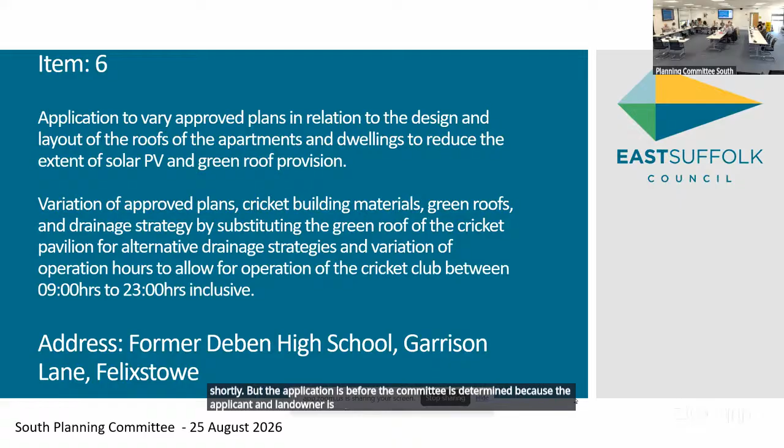So this is the application site. It includes the land that is hatched and then the land outlined as red. The access is off Garrison Lane. The road on the eastern boundary is Garrison Lane, and it's adjoined by residential properties to the north at Nursery Walk, and to the south at Newry Lane. Then you have land of open space to the west of the site with a public right of way going through it.

As you can see from the site plan, this land was previously occupied by a school known as Deben High School, and that's where the main bulk of buildings were. In the top north corner, you also had a sports hall, and then you had the playing fields to the west of the site.

So in 2021, a hybrid planning application was made, which granted permission for a full element and an outline element. The area that's hatched was granted outline planning permission for the leisure uses of cricket use and an indoor bowls club. The element that isn't hatched, but which had the school buildings, was granted full planning permission for the redevelopment of the site for residential use.

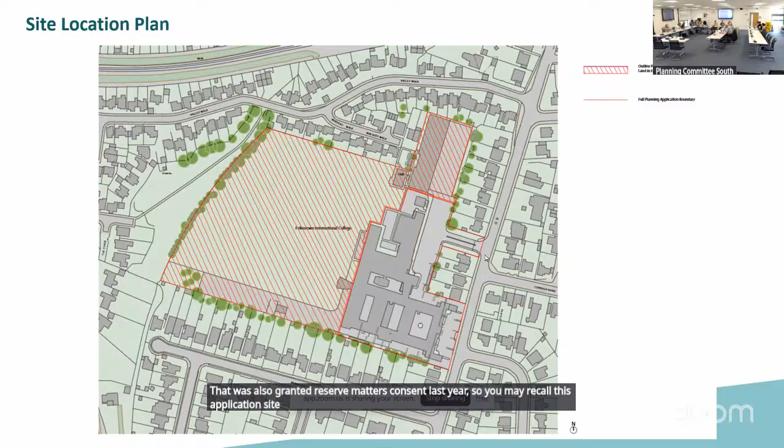There have been two variation of condition applications since made on the residential aspects, granted in 2023 and 2024. This is the third one we've received. The leisure element, which is hatched, was also granted reserved matters consent last year. You may recall this application site coming to committee, I think it was May last year, for the reserved matter details.

So this is the latest aerial photograph that we have, and it just shows the residential being built out. You can see where that's starting to replace the former school buildings, and then the playing pitch and the former sports hall, which has been retained.

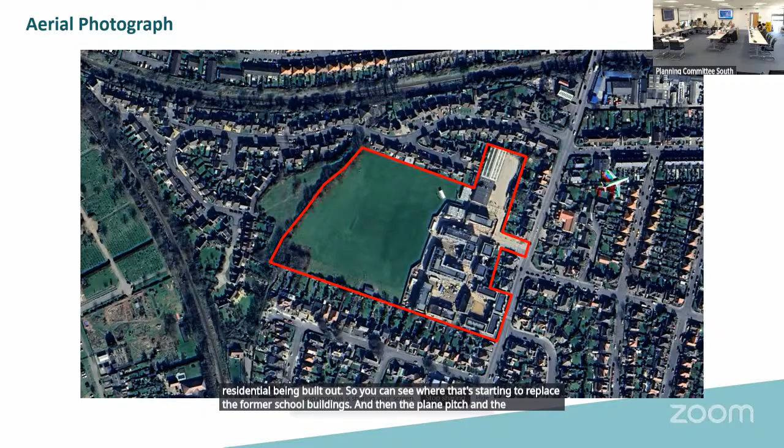In terms of the proposal before us, because it's a variation of condition, it is slightly complicated in the details, so I'll try to take a high-level approach. This table on the screen is extracted from the officer report at paragraph 3.3, so have a look at that whilst we go through it, which should help provide clarity over what conditions are being varied. To start with is the residential, which is looking to make amendments to the roof design.

So that will involve the variation of the approved plans to amend those roofs, and then the drainage strategy as well to accommodate for those roof changes. That's resulting in a loss of green roof and PV panels as a result of those changes.

The second element is the leisure proposal. This is also looking to amend the roof design of the cricket pavilion, relating to a number of conditions shown on screen, and that would involve alterations to the drainage strategy as well. The second part of the leisure proposal is to extend the hours of operation. It was approved that the cricket use could start from 10 a.m., but what's being proposed is that it starts from 9 a.m.

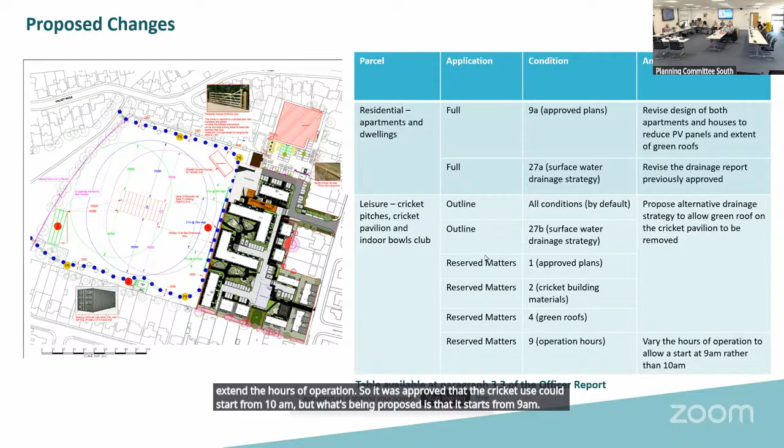So just to go through those changes in a little bit more detail, I'll go through the residential first. On the screen, and over the next few slides, we've got the approved plans versus the proposed - this is all the roof design changes to do with the residential. Generally there's a loss or repositioning of green roof. Sometimes there's introduction of solar panels, and sometimes there is a loss of solar panels.

This apartment block is Block A, on the northern edge of the residential - circled in red in the top right hand corner. This is located next to the leisure car park, and it's not directly adjacent to any existing residential properties, but it is within reasonable proximity to those on Garrison Lane. The roof is not visible from the public realm or any residential properties. The approved plans showed 82 metres squared of green roof, and what's proposed is 26 metres squared. It didn't approve any solar panels, and what's proposed is 18 solar panels.

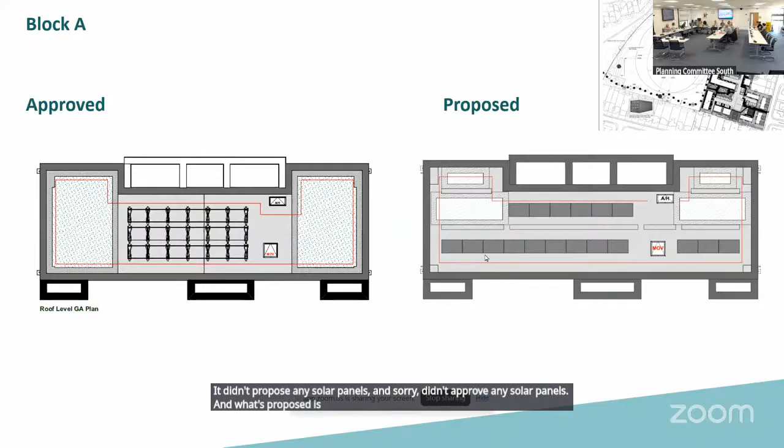This is just a photograph taken from the roof of Block A, so you can have a bit of an idea of what that actually looks like.

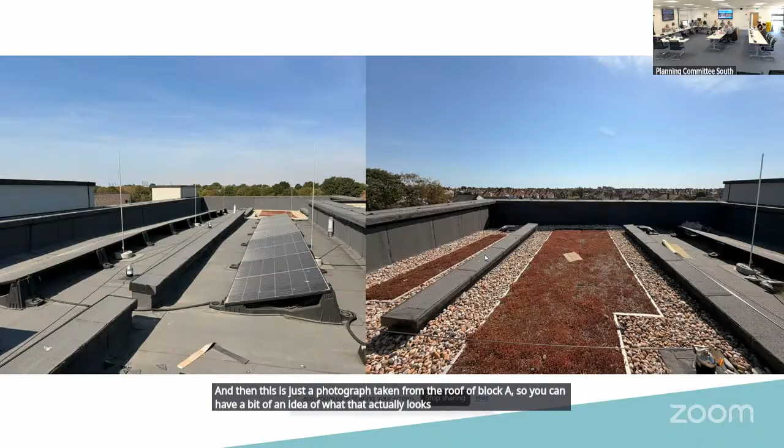Block B is located just south of Block A. Again, it's not located adjacent to any of the existing residential properties, and the roof is not visible from the public realm. It was approved that there would be 210 metres squared of green roof, and it's proposed at 76 metres squared. It didn't approve any solar panels, but 28 solar panels are proposed.

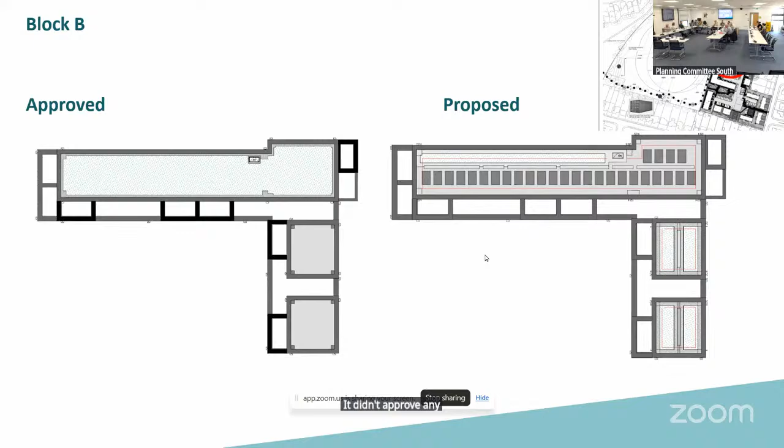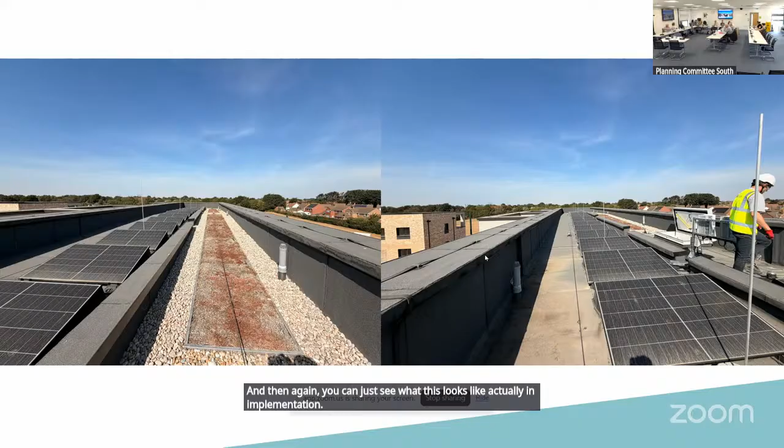Block C, just south of Block B - again, not adjacent to any existing residential properties, and the roof again is not visible from the public realm. The approved plans showed 183 metres squared of green roof, and it's proposed to have 68 metres squared. The approved plans on this one did also show 40 solar panels, and we've got 26 proposed.

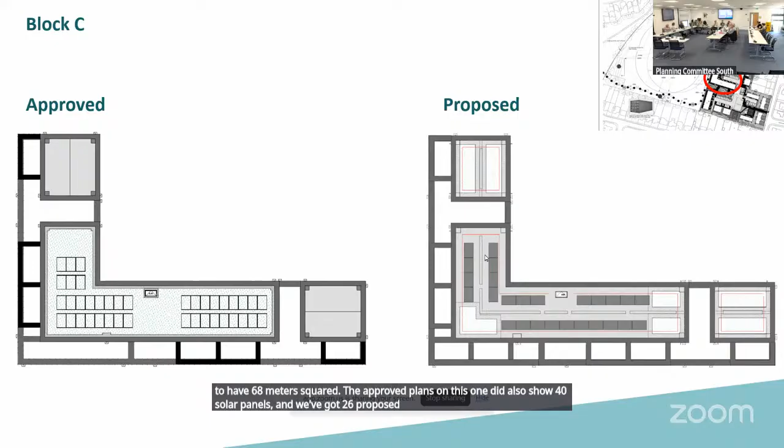And then here's the photos from the roof.

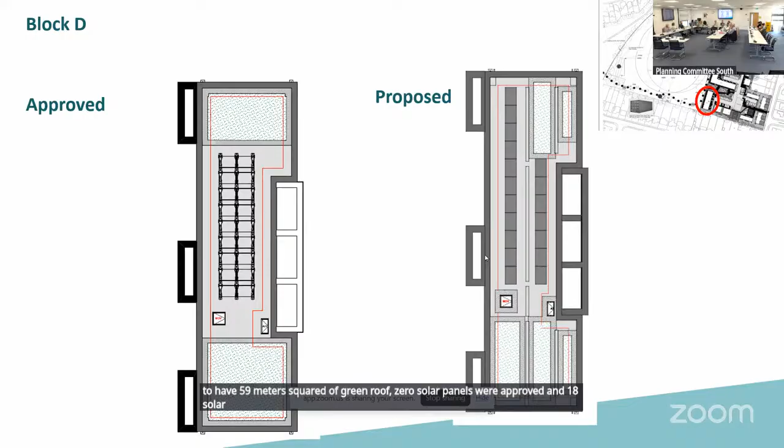The last apartment block is Block D. This one is adjacent to residential properties on Newry Avenue, but due to its height and parapet, the roof is not visible from any public vantage points or the nearby residential properties. The approved plans showed 89 metres squared of green roof, and it's proposed to have 59 metres squared. 0 solar panels were approved, and 18 solar panels are proposed. And then these are the photos from that roof.

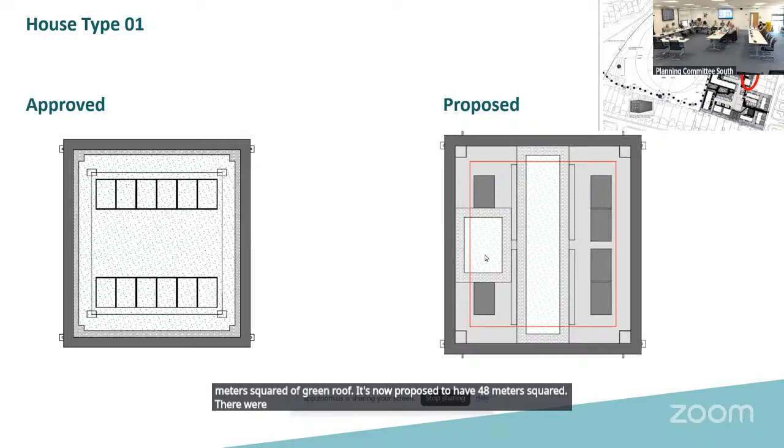We also had some dwellings approved as part of this scheme, known as house type 01. There were 4 in total approved, adjacent to the dwellings on Garrison Lane. Cumulatively across all 4 properties, it was approved that there'd be 170 metres squared of green roof; it's now proposed to have 48 metres squared. There were also 24 solar panels, and it's now proposed to have 12.

These photos were taken from 2 different angles. The photo on the left was taken from the apartment block of Block A on the balcony, so you can see that the roof is not visible from any public points. The second photo, on the right-hand side, was taken from the roof, so you can start to see what that looks like, but that isn't actually visible from any balconies or windows within the apartment blocks. You can get an idea for the relationship with the properties in Garrison Lane, and can see that due to the height of the building and then the parapet, it means it's very, very unlikely there would be any visibility from those properties onto the roofs.

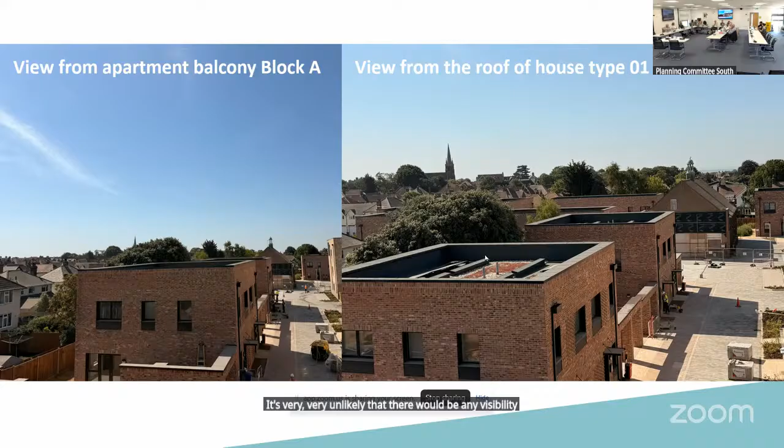House type 2 - there are 4 of these properties, 2 located adjacent to Newry Avenue and 2 on Garrison Lane. Across all 4 properties, 170 square metres of green roof was approved, and now 72 square metres is proposed. There were 28 solar panels approved, now 12 solar panels proposed.

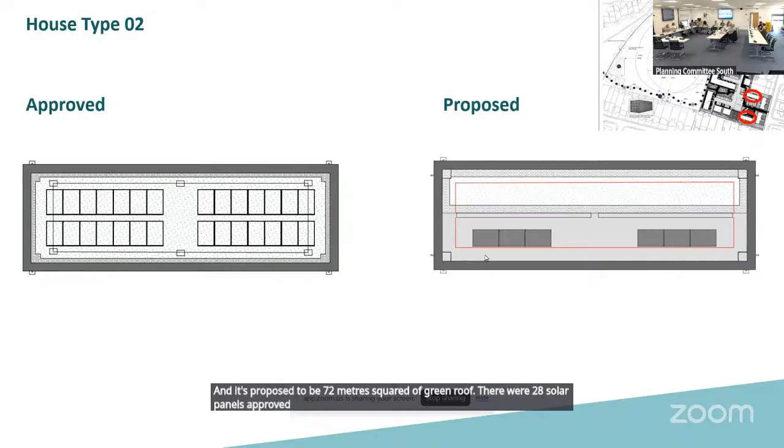There's no public vantage point at all of this roof, so Kier, the developer, have sent photos just to give an idea of what that looks like.

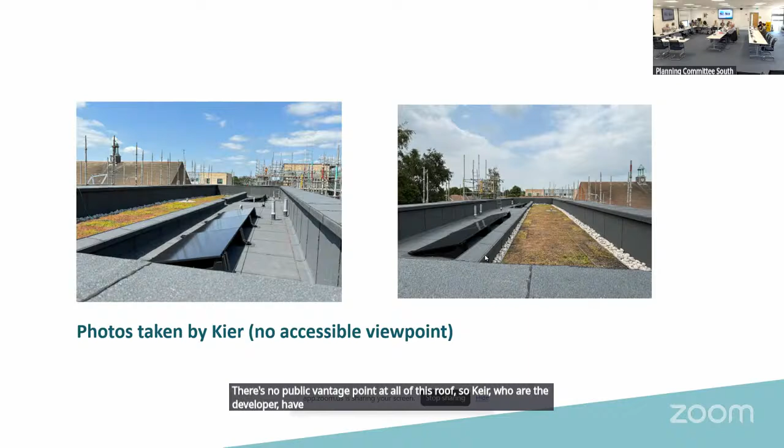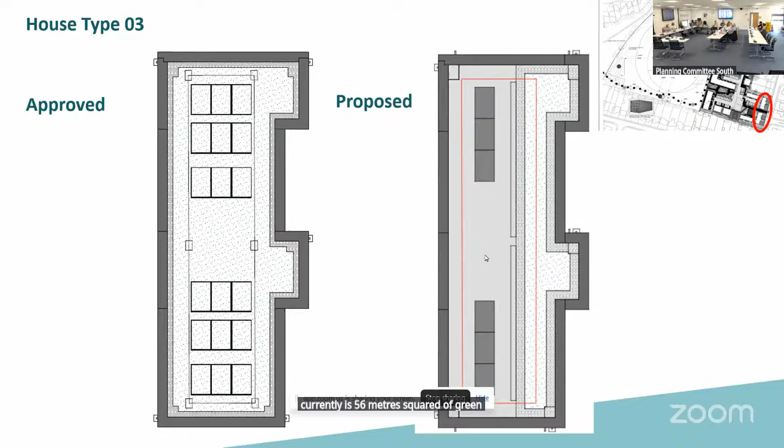House type 3 is located directly off Garrison Lane, fronting directly onto that street, but again the roofs are not visible from the public realm. There are 4 dwellings of this house type, and it was approved there would be 223 square metres of green roof, now proposed at 56 square metres. There were 36 solar panels approved, now proposed for 12 solar panels on that roof.

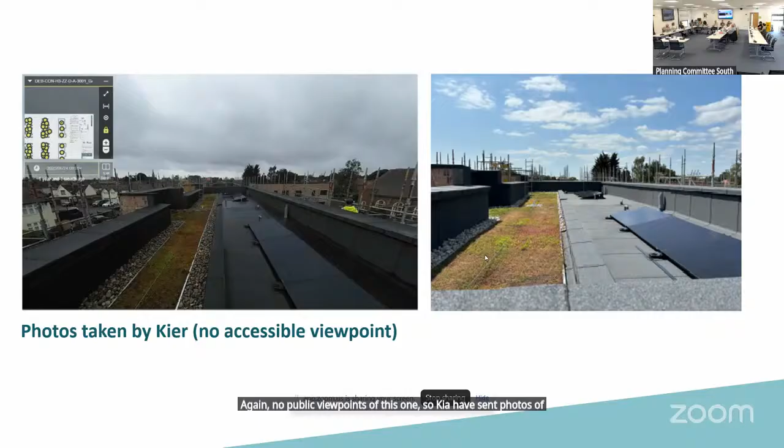Again, no public viewpoints of this one, so Kier have sent photos of that too, taken in July 2025.

The last house type is house type 4. Again, there are 4 dwellings of this, located on the southern boundary adjacent to the properties on Newry Avenue. It was approved that there'd be 205 square metres of green roof across all 4 properties, now proposed to be 46 square metres. There were 36 solar panels approved, now proposed to have 12 solar panels.

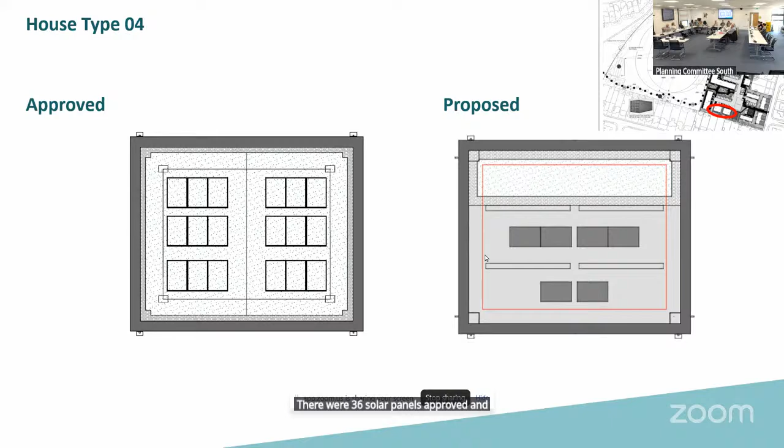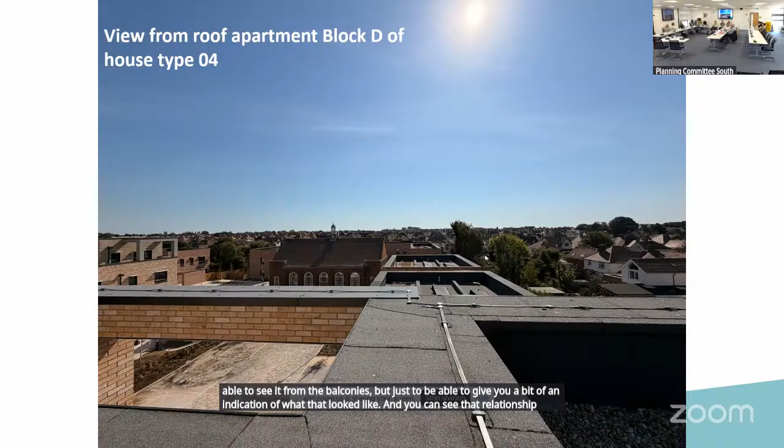This one you can see from the roof of apartment block D. Again, you won't be able to see it from the balconies, but just to give you an indication of what that looked like. You can see the relationship with the properties on Newry Avenue as well, on the far right hand of the screen.

Moving on to the leisure proposal. The changes to leisure have been set out at paragraph 10.17 of the officer report if you want to look at those in more detail. As a reminder, the leisure parcel was granted outline consent as part of the hybrid application, and then came in as a reserved matters application last year to agree those finer details.

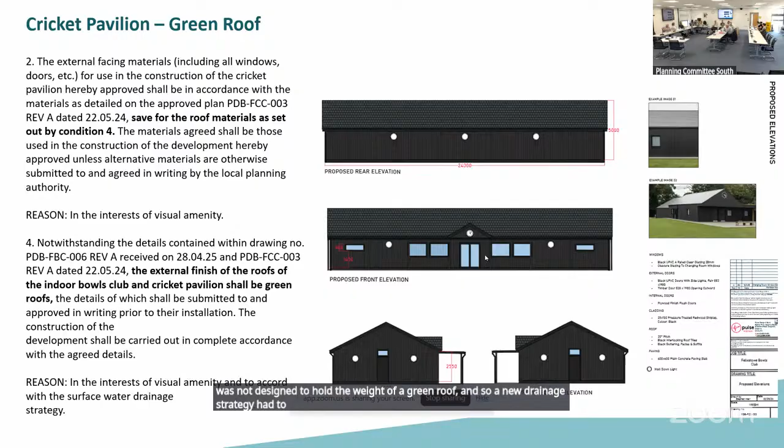In the reserved matters application, the drainage strategy approved a green roof to the indoor bowls club and the cricket pavilion. Condition 4 required the details of the green roofs to be agreed, and condition 2 required the cricket pavilion to carry out the development in accordance with those details. However, it came to light after the application was approved that the roof was not designed to hold the weight of a green roof, so a new drainage strategy had to be looked at, which I've just extracted on the next slide.

This shows, where I've circled in red, that it's proposed to provide raised planter rain gardens instead of the green roof. Essentially it would serve the same function as the green roof in terms of cleaning the water slightly better, but it was only acting to slow down the drainage, which the rain gardens would be able to serve the same purpose as the green roof as approved.

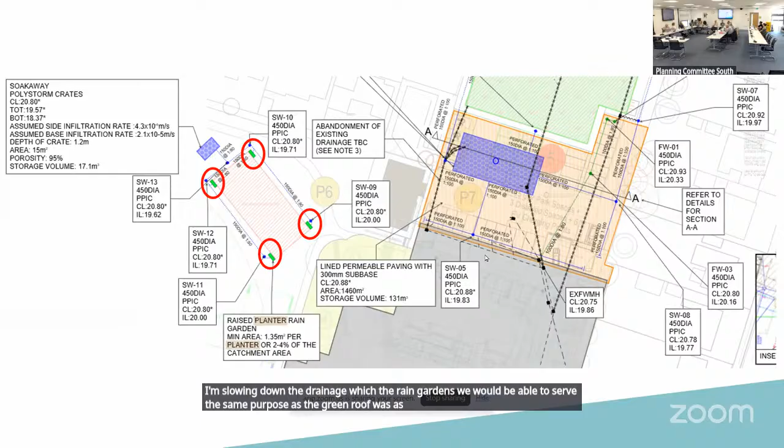The second element of the leisure proposal is the change in operation hours. The Reserve Matters application approved operation hours of 10 a.m. till 11 p.m. But after the application was approved, the cricket club said they would prefer to start earlier on site to be able to set up before games and start practicing, and asked if they could start at 9 a.m. A revised noise assessment has been submitted to address that.

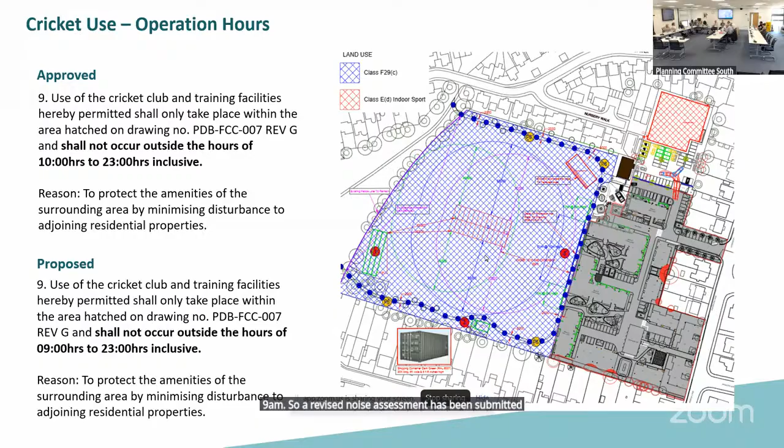So these are the key material considerations. As it's a variation of condition application, we're only looking at those relevant to the amendments being sought. Let me briefly go through the residential ones to start.

The first key consideration was design. Because there was limited to no visibility of the roofs, the changes would not be considered to impact the overall design quality or visual amenity of the scheme. In relation to ecology, the green roofs did not form part of the biodiversity or ecological enhancements of the scheme, and the ecology officer has raised no objection.

In relation to the drainage strategy, the green roofs did form part of the drainage strategy, but acted as an additional treatment. The amended drainage strategy demonstrates that the reduction in green roofs does not impact the SUDs, as it was just a treatment of the water rather than a requirement of the actual drainage strategy. The LLFA has raised no objection as a result.

Lastly, for the residential, sustainability. At the time the hybrid application was approved in 2021, our sustainable construction policy was still relevant, which required a TER reduction - a 20% reduction in CO2 below the TER set out in building regs. The approved development back in 2021 predicted a 59.6% reduction in CO2. The proposed calculations, even taking into account the revisions, actually show that reduction would be taken down further to 76.28% below the CO2 targets within building regs, so it remains compliant with that policy.

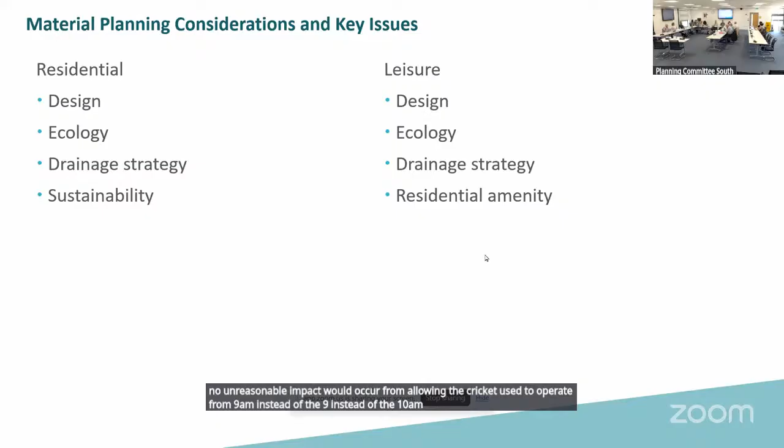In relation to residential amenity, the main consideration was the operation hours changing and the impact of noise on neighbours. A noise assessment has been submitted with the application, and that shows that no unreasonable impact would occur from allowing the cricket use to operate from 9 a.m. instead of the 10 a.m. as approved. Environmental Protection have reviewed that and raised no objection.

So the conclusion for leisure is that the proposed changes would remain policy compliant and would not alter the acceptability of the scheme.

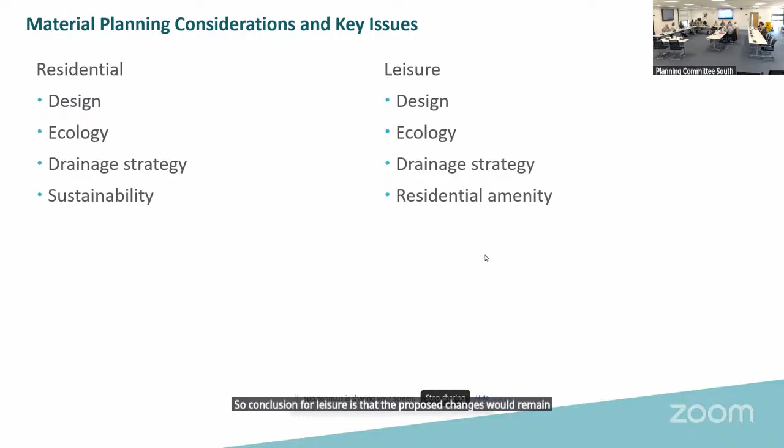So the application is recommended for approval subject to a number of conditions. The conditions on the hybrid planning consent remain relevant, so that's for the outline and full. The conditions imposed on reserved matters consent remain relevant. There are some changes to the conditions relevant to the amendments sought through this application, and some changes to conditions where details have been discharged through discharge of condition applications since those applications were granted consent.

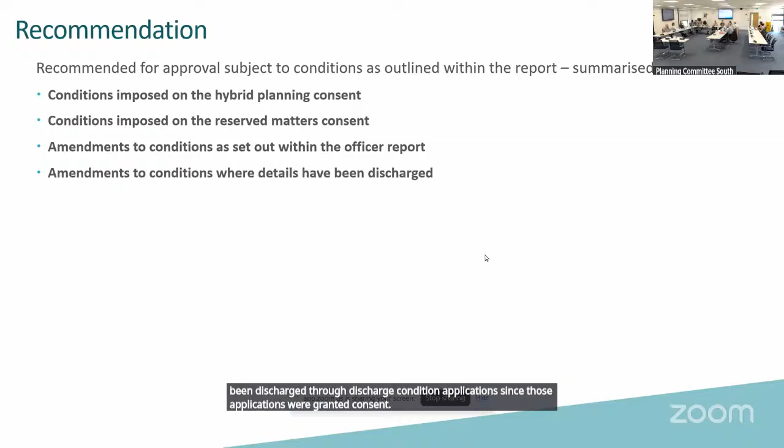Before I ask others for questions, LLFA, what does that stand for? Sorry, Lead Local Flood Authority. Thank you very much. Does anyone have any questions?

Councillor Daly: Thank you for that. On the residential side, I've just got a big question really - why are we cutting our green roofs and cutting our solar panels? Because we're the applicant, East Suffolk Council is the applicant. Do you know what, we're a green-led administration and we're into solar panels and green roofs. Can you just answer that question - why are we making these changes then?

As far as I understand it, it's because the scheme, where it's passive house, required additional ventilation and vents coming out of the roof that hadn't been accounted for when the approved plans were drawn up and subsequently approved. Since then, as it's gone through construction and building regulation drawings, it came to light that where they needed these vents, it meant they couldn't execute the green roofs and solar panels in the way that had been approved. The applicant is intending to speak, so they might be able to expand on that further, but that's my understanding of why the changes have been provided.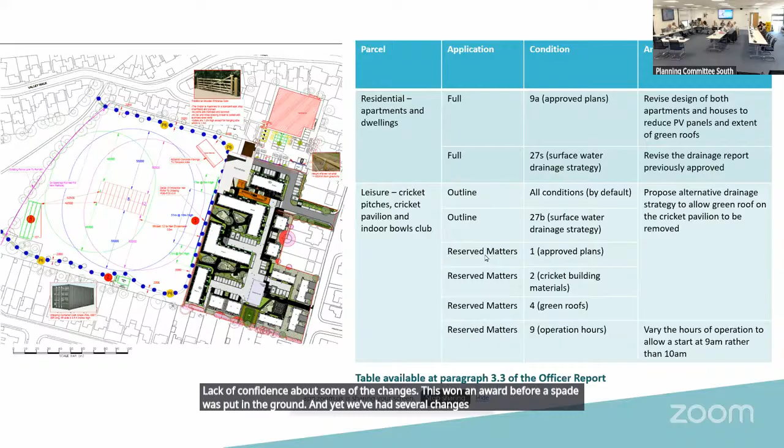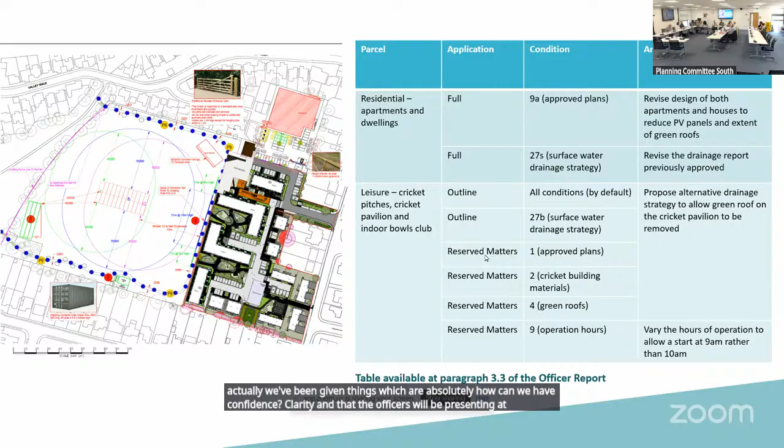Any other points of clarification? Anyone? Sorry. Okay, that brings us to public speaking. Is that right?

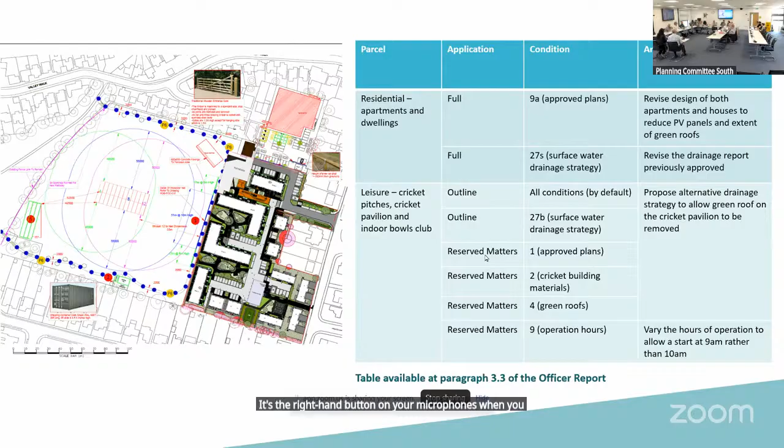Good afternoon, thank you for the opportunity to speak today. I am the planning consultant acting on behalf of the applicant. This slot is being shared between myself and project representatives from the residential and leisure teams. We feel the officer's report provides a comprehensive and robust assessment of the proposal, which is to vary the wording of a selection of planning conditions to ensure this exciting project remains deliverable and continues to secure the community benefits associated with the original planning approval, which was for a high-quality mixed-use scheme of new housing and community sport and recreation facilities. The committee report confirms that the changes required to make this deliverable are all in accordance with the relevant planning policy, particularly in relation to sustainability, energy, and design quality.

The applicant has worked proactively with the local planning authority prior to the submission of the Section 73 application, responding to all technical queries when required. This engagement has continued up until this point, working with the planning team to respond to all queries raised. I feel it is important to note that all statutory consultees have not objected to this Section 73. That includes the Lead Local Flood Authority, Environmental Protection, East Suffolk Ecology, and Felixstowe Council. Overall, the scheme continues to deliver energy efficient homes and a sustainable construction approach, while supporting East Suffolk Council's leisure objectives and wider well-being goals.

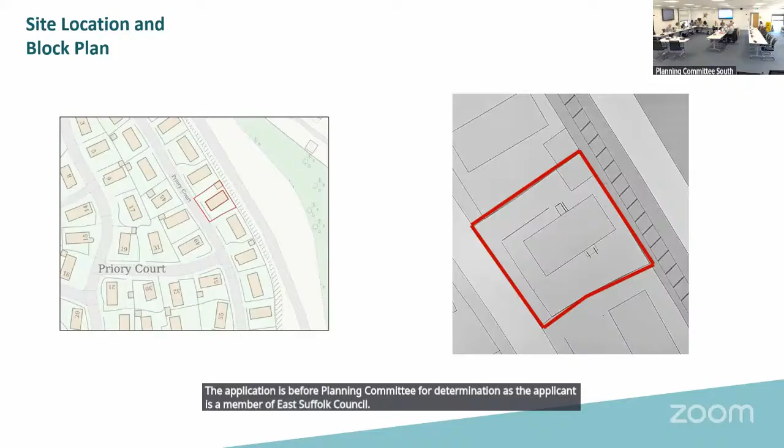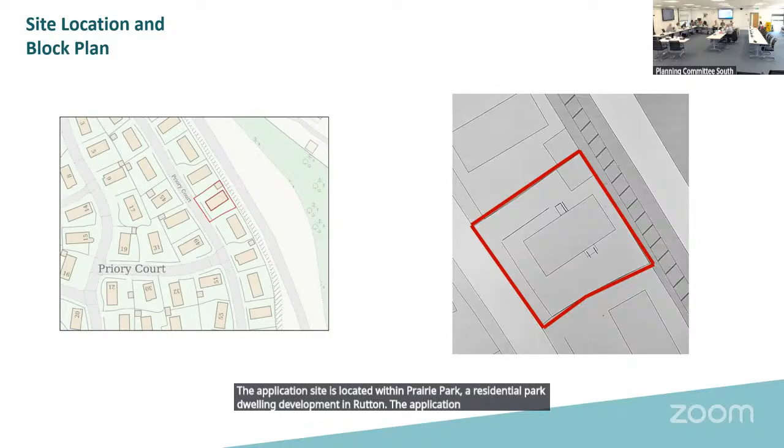The application site is located within Priory Park, a residential park dwelling development in Nacton. The application property is of static caravan construction and is positioned on a ground level lower than the road. The driveway and the front garden slope downwards towards the dwelling. The proposed additions are to be sited to the north and south of the dwelling.

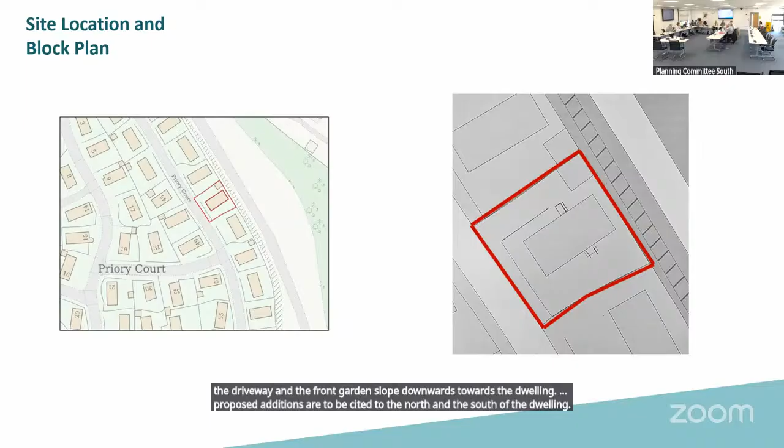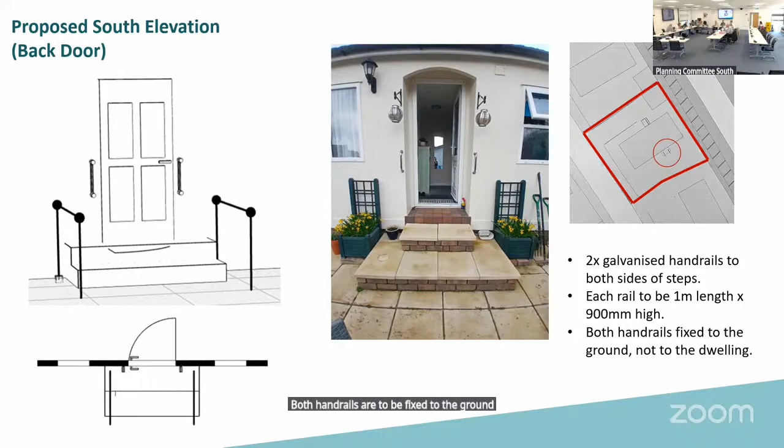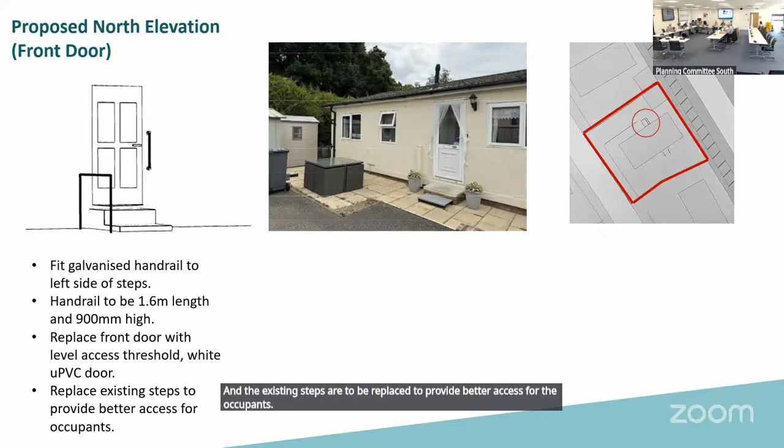The proposed north elevation: the galvanised handrail is to be along the length of the driveway. This rail is to be 8.3 metres in length and 900 millimetres high.

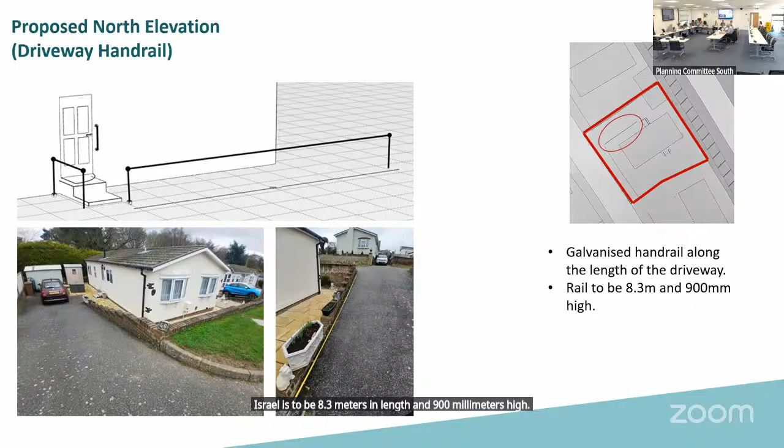The material planning considerations for this are the design and appearance of the proposed works and the impact on the appearance of the site and surrounding area. The proposed works are limited to accessibility improvements to the existing dwelling and would not materially alter the relationship between the application property and the neighbouring dwellings. No objections have been received.

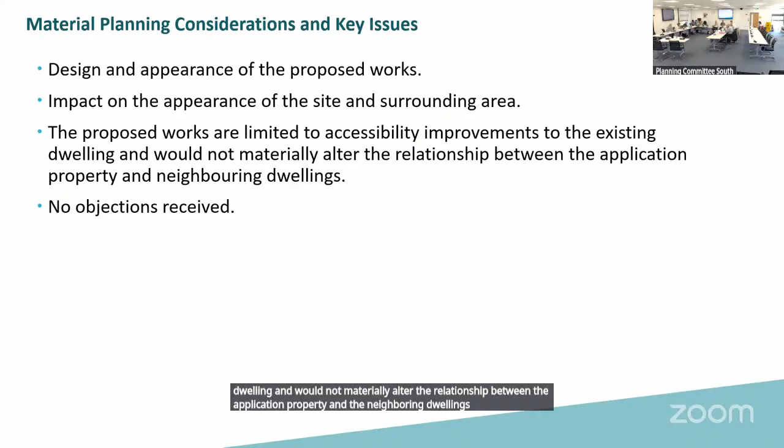The application is recommended for approval, subject to conditions as outlined in the report: the standard 3-year time limit condition, as well as to be carried out in accordance with the approved plans. And that's all, thank you, Chair.

Thank you, Louise. Members, do you have any points of clarification? Questions?

Do we have any public speakers on anything here? No. So any questions, any clarifications? No, so none? No questions.

Debate? So debate then. Whose ward is this in? Do you want to debate the matter or raise any points? I wouldn't say debate. This is an area full of more elderly people, and this seems a very sensible solution. Councillor Niven: I think this is very much the type of adaptation we would do ourselves for a resident whose mobility is impaired, and I think it's perfectly acceptable.

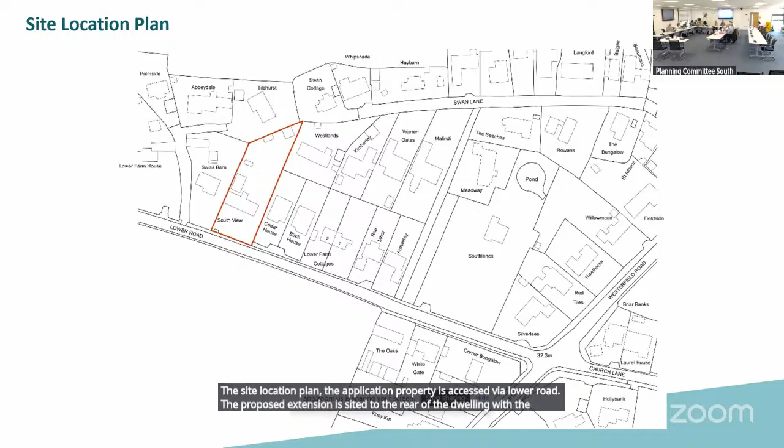The site location plan: the application property is accessed via Lower Road. The proposed extension is sited to the rear of the dwelling, with the conversion of the garage visible from the principal elevation. An aerial photograph shows the wider context of the site, including the open field opposite the property, with limited opportunity for overlooking or wider visual impact arising from the proposal.

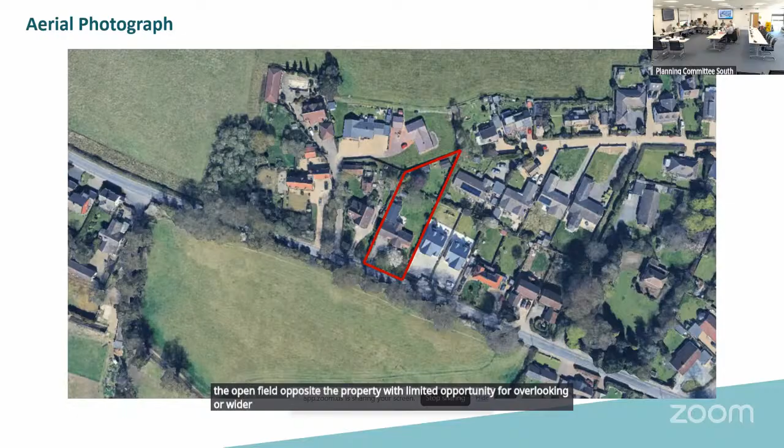Photographs from the rear garden show the white-clad detached garden outbuilding, which is to be demolished, and demonstrate the relationship with the neighbouring dwelling to the east. The proposed extension projects a modest 2.1 metres from the rear wall of the dwelling. The proposal includes removal of doors to the kitchen extension, to be replaced with a window.

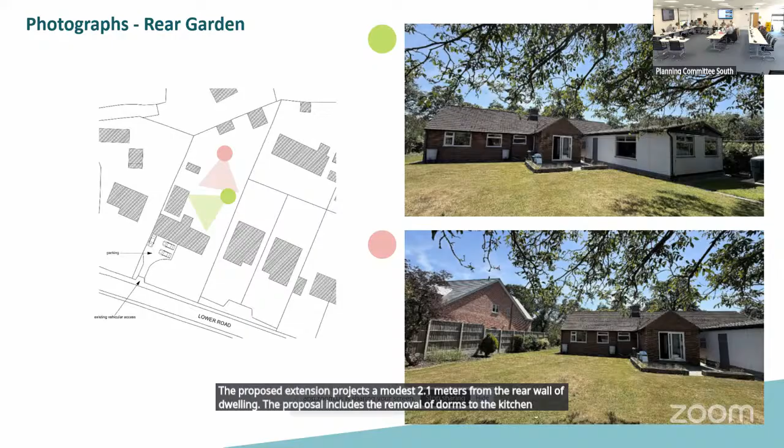Photographs from the principal elevation, which can be seen from the road. The integral garage is to be converted to form a bedroom.

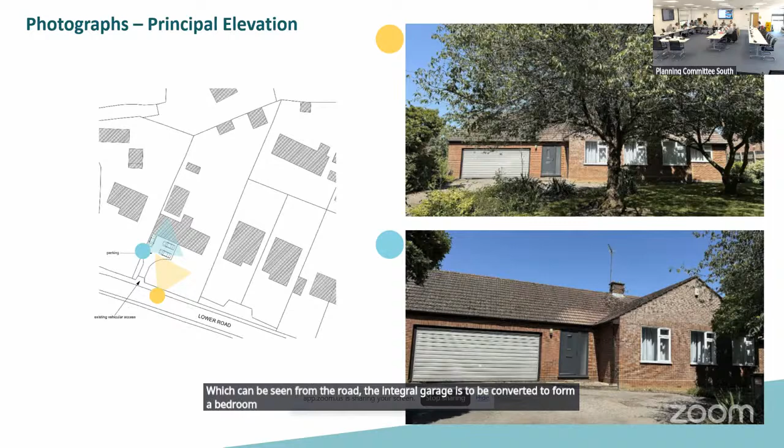To summarise, the application seeks permission for the conversion of an existing integral garage to form an additional bedroom with ensuite facilities, with the garage door to be replaced with 2 windows, a modest rear extension, with the large detached garden outbuilding to be removed.

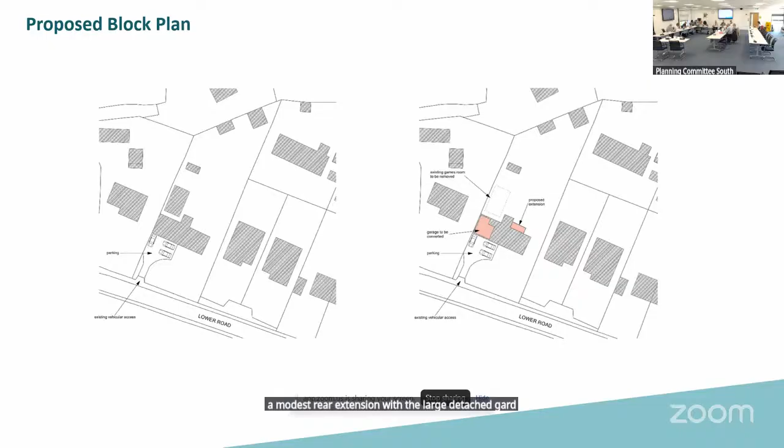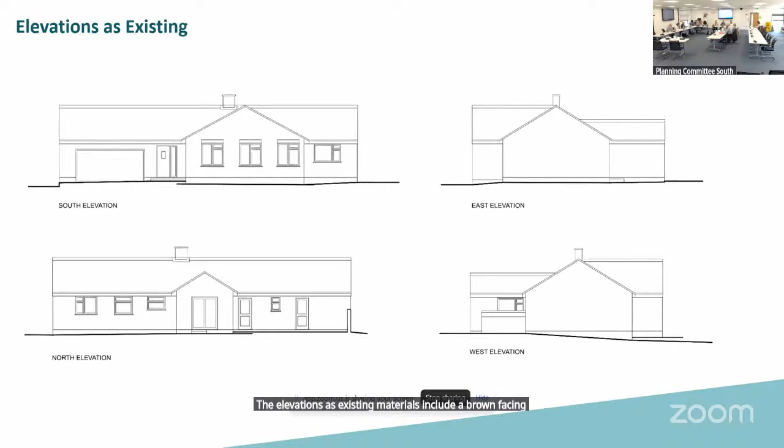The elevations as existing show materials including brown facing brickwork with white UPVC windows. The elevations as proposed show that the proposed external materials would match or complement those of the existing dwelling, including white UPVC windows and facing brickwork to match the existing property. The rear extension would have a flat roof with a dark grey finish.

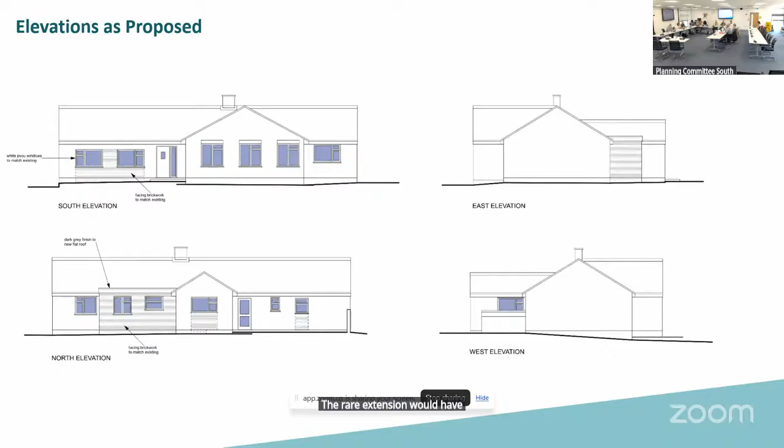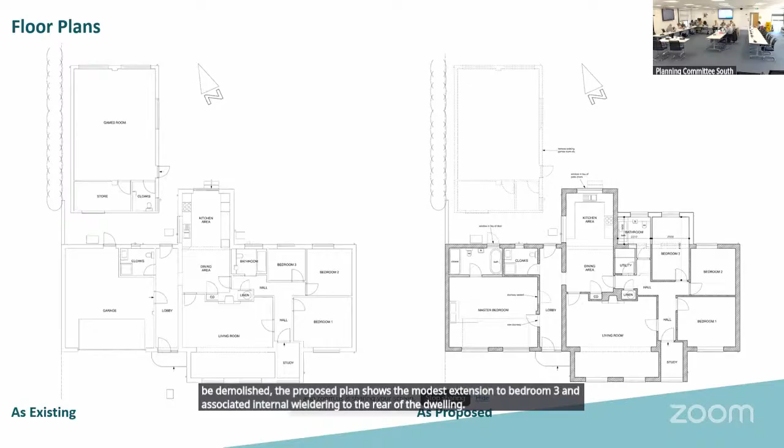The existing and proposed floor plans also show the detached building to be demolished. The proposed plan shows the modest extension to bedroom 3 and associated internal reordering to the rear of the dwelling. The conversion of the garage creates an additional bedroom, bringing the dwelling to a 4-bedroom property.

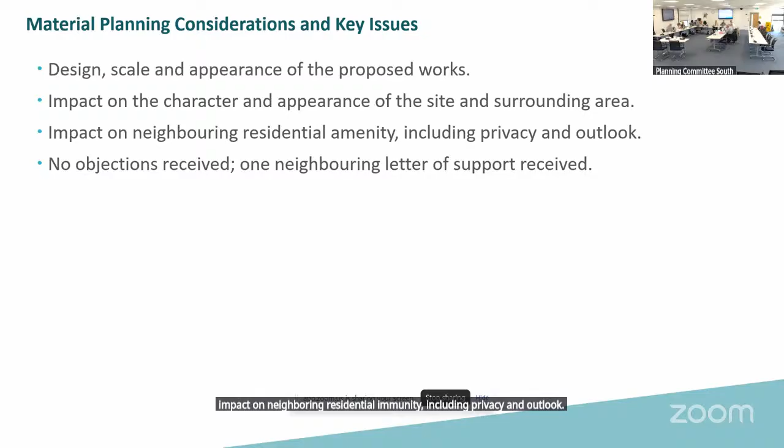The material planning considerations for this application include the design, scale and appearance of the proposed works, the impact on the character and appearance of the site and surrounding area, and impact on neighbouring residential amenity, including privacy and outlook. No objections have been received, although one neighbouring letter of support has been received. The application is recommended for approval, subject to conditions as outlined in the report, with the standard 3-year commencement condition and development to be carried out in accordance with the approved plans. Thank you, Chair. Thank you.

Do we have any questions of clarification? Councillor Byatt: yes, clarification really. I'm not sure whether I'm allowed to ask this question, but I'll still ask it. Do we know if this is being carried out under the Sizewell scheme, in terms of offering up part of your home to be converted into accommodation for Sizewell workers, just out of interest? Thank you. It is not that I know of, no.

We've got no public speakers, so any further questions generally from members? So we can debate the application then.

Councillor Hedgley, is that in your patch? It is in my patch, Mr Chairman, thank you very much. This is quite a modest change in actual fact, and the design does not unduly affect the road or the area or the environment, and it's quite acceptable as far as I'm concerned. Thank you. Anyone else got any comments to make?